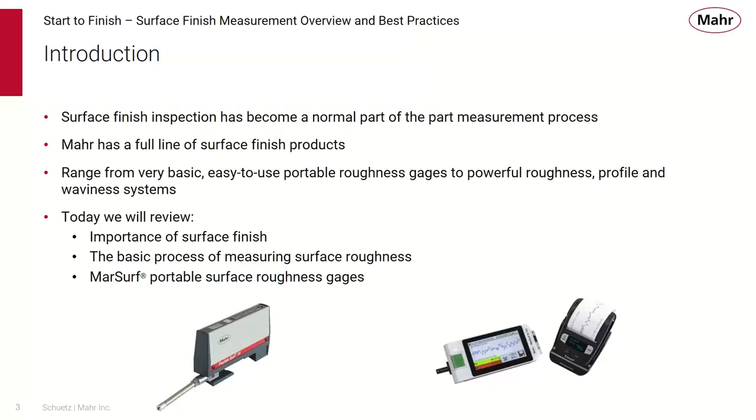Surface finish inspection has become a normal part of the part measurement process. Mahr has a full line of surface finish products, ranging from basic, easy to use portable roughness gauges to powerful roughness, profile, and waviness analyzing systems. Today we'll review the importance of surface finish, the basic process of measuring surface roughness, and the MarSurf portable surface roughness gauges we can provide.

It's very important to monitor surface finish. As dimensional tolerances have tightened, form and surface errors become more significant. Tighter tolerances are required for aerospace, electronics, automotive, medical, and precision manufacturing products. Every surface has some function, and unless it's measured, no one will know if the product performs as desired. This chart shows that since the 1940s tolerances have tightened dramatically, and the percentage of form and surface finish within that dimensional tolerance has grown, so it's more important than ever to keep surface finish and form errors under control.

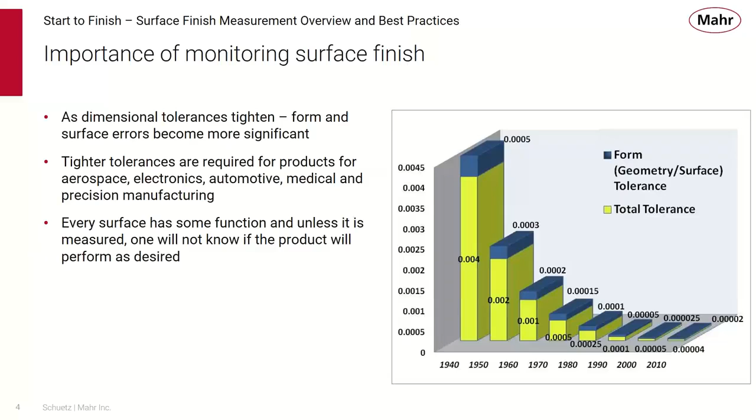Why is surface finish control important? There are many reasons for wanting a controlled surface finish. Appearance is the most obvious - finish affects a part's reflectivity and consistency. Our top photo shows a very reflective part and a matte part, each with a different surface finish characteristic.

There's also surface function, like adherence of coating. If you're trying to paint a surface, too smooth a surface means the paint is not apt to stick. But if the surface is too rough, the paint might not cover it completely.

There's also surface interaction. For a sliding surface you want a smoother, reduced surface finish, but sometimes a surface finish is created with a specific roughness that allows gaps for oil to sit in and help lubricate the surface.

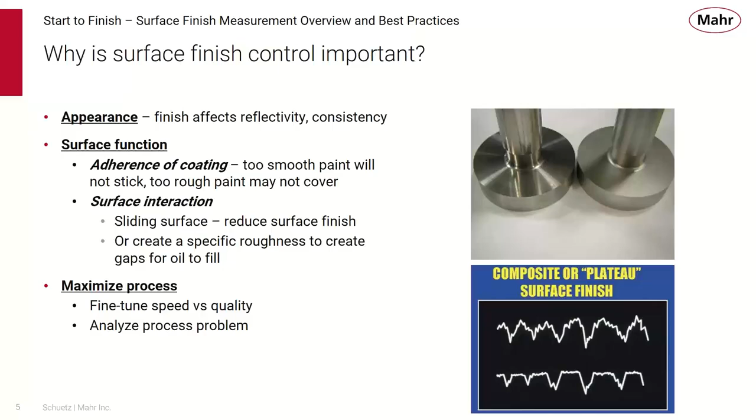We also want to control the surface to maximize the process. We fine-tune the speed and feed quality of the machine tool to produce the best part with the proper surface finish. By looking at surface finish we can also analyze process problems, such as bearing failure becoming part of the surface, causing more roughness conditions.

Where does surface finish come from? Basic components and elements of surface finish come from the machining or manufacturing process. Most machining processes produce three elements of the total profile, with roughness being the most influential.

On the left you see all the components of a typical machining process: motors, pulleys and gears, bearings, a rotating spindle, a tool moving along a carriage, which moves on the bed of the lathe. Each one of those puts a different component of the surface onto the part.

We have roughness from the tool itself, vibration which shows up as waviness, and long range form errors like straightness from the lathe bed. All of those combine to give us a total profile, and by filtering we can select and look at each component individually.

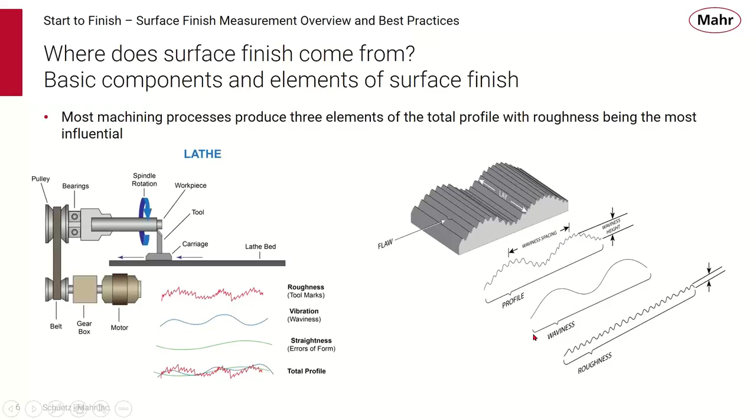Surface finish measurement started a long time ago with a scratch pad standard. This was the old thumbnail test, where operators would scratch their thumbnail over a patch to get an idea of how rough that surface felt, then compare their workpiece to that standard. As you can imagine, that's a very human-influenced measurement.

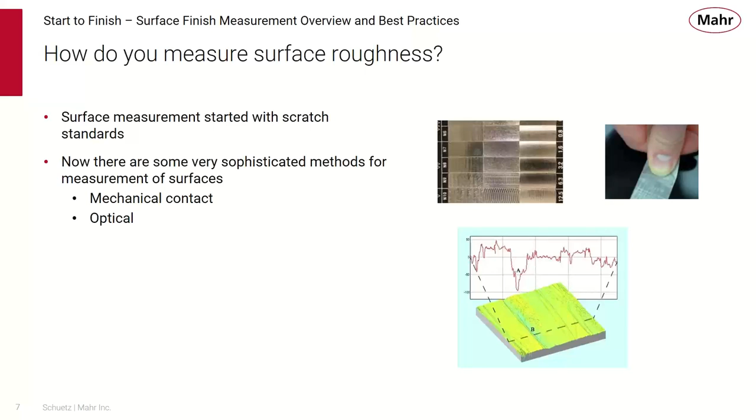Now there are some very sophisticated methods for measuring surface finish. These are mostly mechanical contact measuring systems, but rapidly over the past five years or so, optical surface finish measurement has become very popular and very high performance. But we'll concentrate mostly on contact surface finish.

Basically there are two contact methods for surface roughness evaluation, and Mahr provides both types of surface evaluation measuring instruments - portable roughness instruments using skidded measurement, and also skidless portable measuring instruments.

With a skidded measurement, we have a drive that moves a probe along the part, and within that probe is a skid which follows the surface with the probe contact going through it. So skidded instruments measure only roughness - waviness is filtered out by the skid following the surface, and most portable instruments use this skidded method.

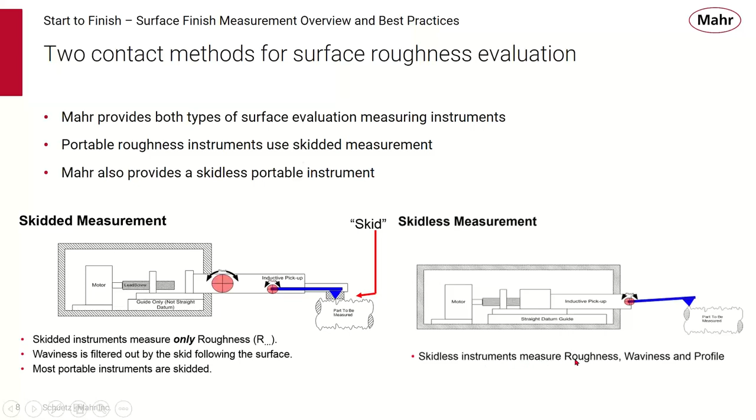Mahr also makes skidless measuring systems. These types of probes and drives have a precision, straight reference datum as a guide, which the probe follows, and just the contact itself monitors the complete profile of the part. So skidless instruments can measure roughness, waviness, and profile.

Now, once we measure the profile, we want to be able to analyze the results, and those involve using different parameters. These are standard measuring processes for determining what that roughness represents. There are nearly 100 parameters for surface finish evaluation, used for things like the stability of the manufacturing process, finding the functional characteristics of surfaces, or determining the analytical capabilities of the instruments themselves. We want some standards to tell us how good our systems are.

Now, the most common parameter is R sub A, or RA, or roughness average. Since the roughness profile contains peaks and valleys of different heights, an averaging method is used to quantify the surface. There are very similar methods. Some other common ones are R sub Z and R max.

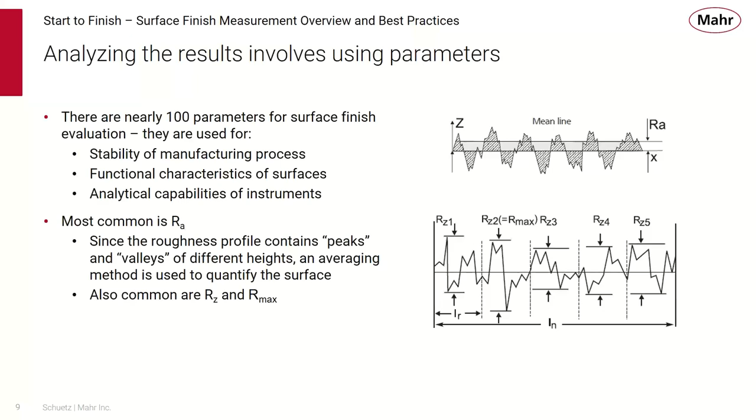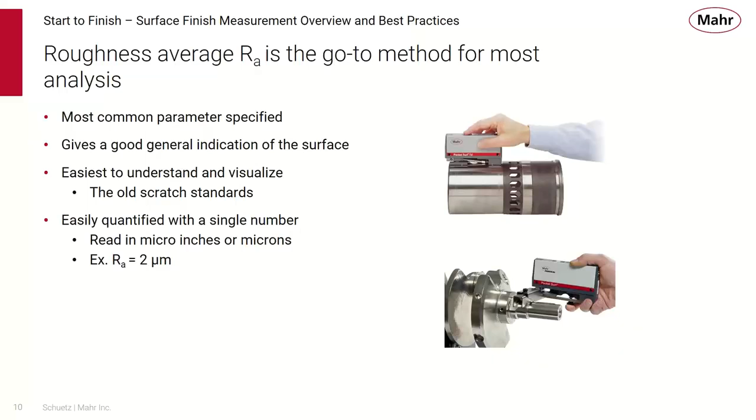But roughness average, RA, is the go-to method for most analysis. It's the most common parameter specified. It gives us a good general indication of the surface. It's easiest to understand and visualize, a lot better than the old scratch standards, and it's easily quantified with a single number. You read micro inches or microns generally as the dimensional measurement, so it's very easy to understand that R sub A equals 2 microns. RA is the most commonly specified parameter, particularly in the US.

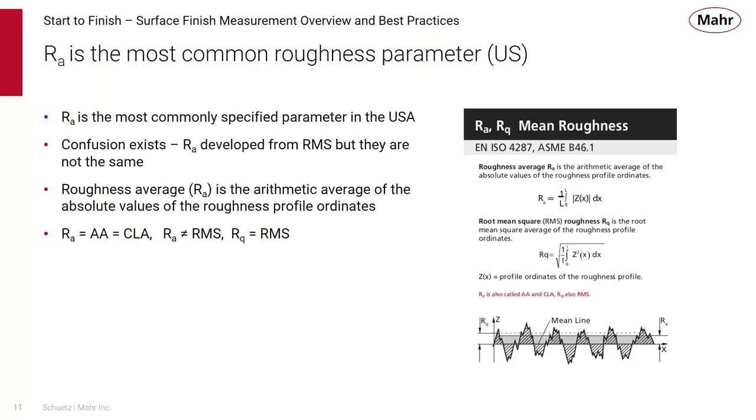Now, confusion still exists from many years that RA was developed from RMS, but they really are not the same. Roughness average is the arithmetic average of the absolute values of the roughness profile ordinates. So RA equals arithmetic average or centerline average. RA does not equal RMS. There is another parameter called RQ, which equals RMS. Within all the ISO or ANSI standards, there are formulas that describe how to calculate the various parameters.

Now you can have very different surfaces and get the same R sub A. Surface performance is different due to bearing contact, for example. RA is often specified and is valuable for monitoring process stability, but other parameters may be needed to monitor for surface function.

So looking at these two drawings, you can see that they have very different characteristics, but because the peaks and the valleys are the same, you're going to get the same roughness average, but they're going to act very differently. If this is a shaft rotating on a bearing-like surface, this is probably going to cause a lot of scratching or lots of forces on those peaks. Where with this type of surface, that contact area or bearing surface is really spread out over the part, and this one is apt to perform better. There are ways to identify which one of these surface characteristics we have.

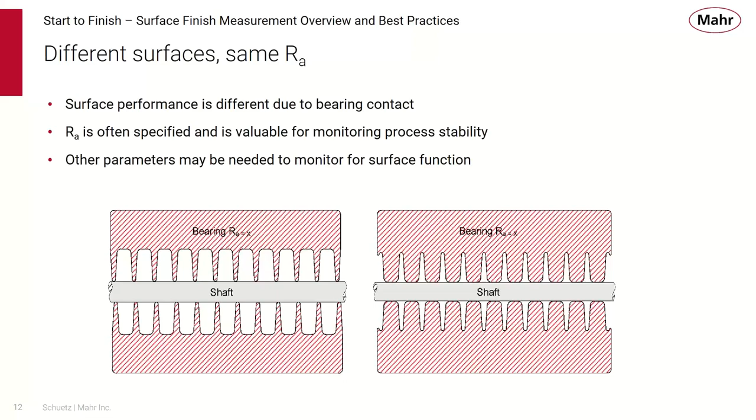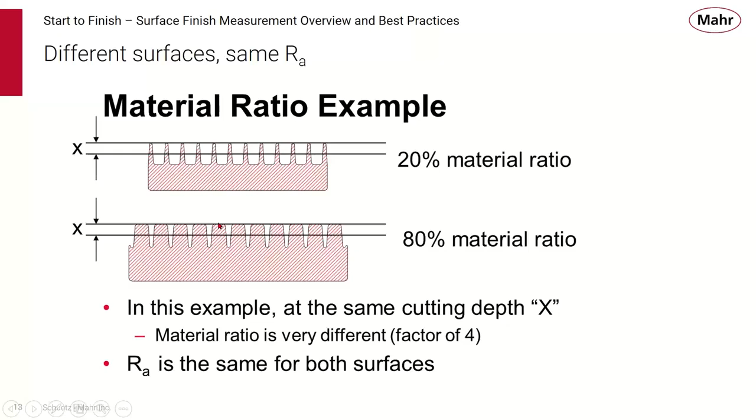One of the ways of doing that is using something called material ratio. You can see that as we take a depth from the peak of the surface, we can calculate how much of the surface is really going to be contacting the part. In this example, at the same cutting depth, the material ratio is very different, in fact, by a factor of 4. But in both cases, RA is the same for both surfaces. So what I'm showing here is that there are different parameters that can give us different information, and material ratio is a way of expressing that contact ratio at different cutting depths.

So you can see this is a system profile done by one of Mahr's machines, where a sine wave was used with an example of 5 micron, and we can plot out, for every depth, what that material ratio is. These are just common parameters that are available in many machines.

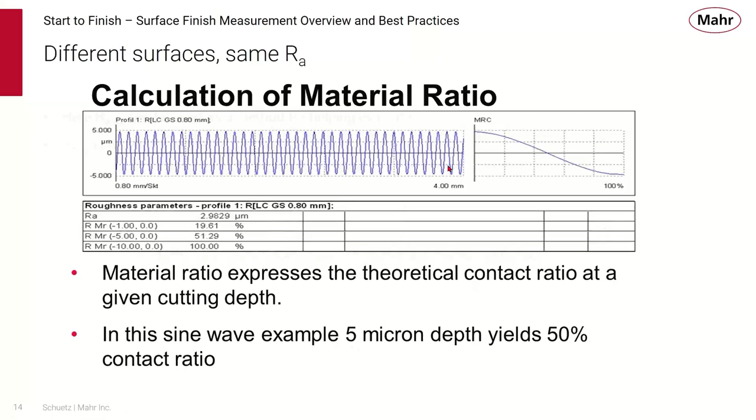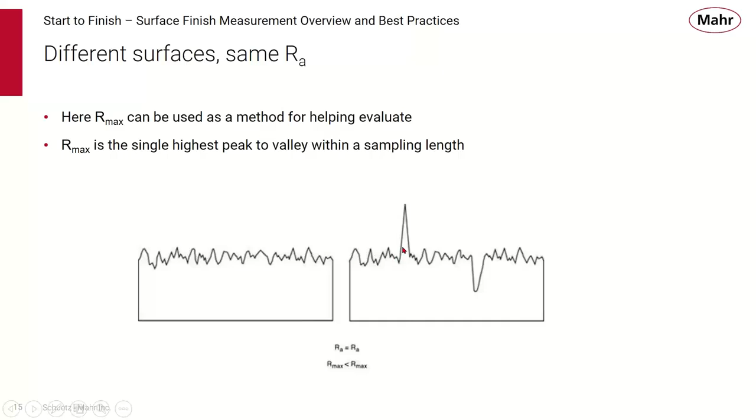Now, there are other different surfaces, but again, they can give us the same RA. But again, using different parameters, we can help evaluate what that surface is really doing. In this case, R sub max can be used as a method to help evaluate some peaks that might be within the surface that can cause problems in function. R max is the single highest peak to valley within the sampling length. So in these cases, the RA might be the same, but the R max is going to be dramatically different.

In the rest of the world, R sub Z is a more common way of analyzing the surface, measuring roughness depth. R sub Z is the most commonly specified parameter throughout the industry outside the US. RZ is the average vertical distance between the highest peak and the lowest valley in 5 sampling lengths. RZ is more sensitive than RA to changes in surface finish because heights are examined, not averages. There is no formal conversion between RA and RZ. The best estimates are where RZ is 4 to 7 times the RA value. So this is basically a very useless comparison. You should either measure RA or RZ.

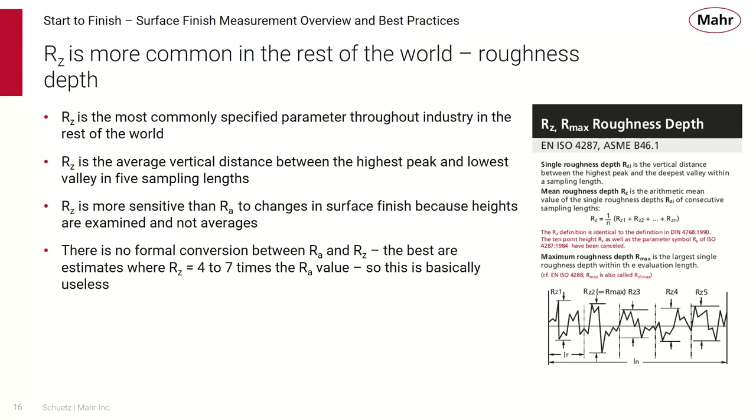Now, where can you go wrong in surface finish gauging? Well, there are a number of different points that we must consider when making a surface finish measurement.

The first one is not understanding the different parameters. There are ISO standards, DIN standards, Japan standards, and you should understand which one you're measuring to, so that if you're in a world organization, you're measuring all parts the same way.

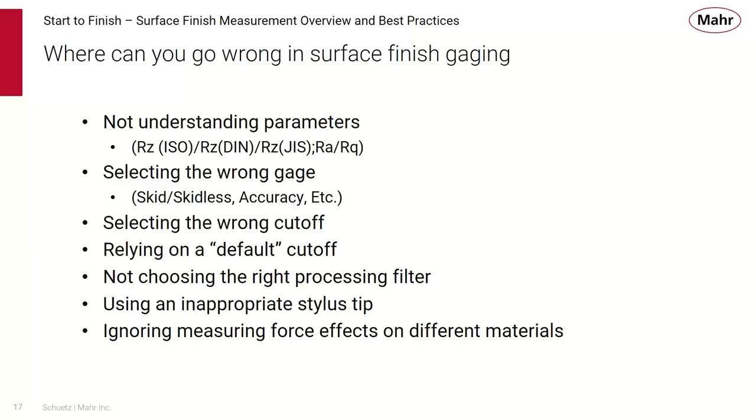Sometimes you can select the wrong gauge, whether a skidless gauge or a skidded system, and the accuracy can affect readings. Selecting the wrong cutoff or sampling length, relying on a default cutoff and letting the machine do all the work, not choosing the right processing filter, using an inappropriate stylus tip since tips come in different radii, and ignoring measuring force, which can affect different materials.

So there's non-adherence to the measurement conditions. Whenever we're setting up a measurement with a surface finish machine, we should understand the cutoff length, the total measuring length, and the type of tracing system.

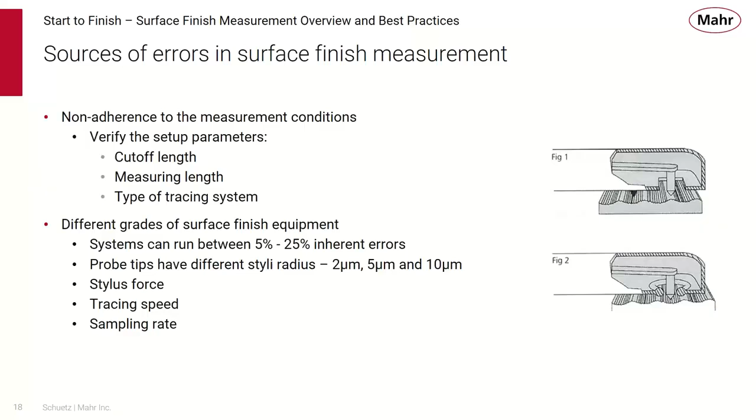There are different grades of surface finish equipment out there, and they can cause differences in readings. Systems can run an average of 5 to 25% inherent errors. Probe tips have different styli radii of 2, 5, or 10 microns, and the stylus forces differ between them. Tracing speeds and sampling rates can also differ, and all of these can affect the result provided by the systems.

Another source of errors is the environment and the setup of the measurement process. There could be vibrations in the environment which translate as noise on the profile. Part movement while being measured is a problem, as are driving and guiding difficulties in the drive unit. If there are problems in the drive, you can get misread readings.

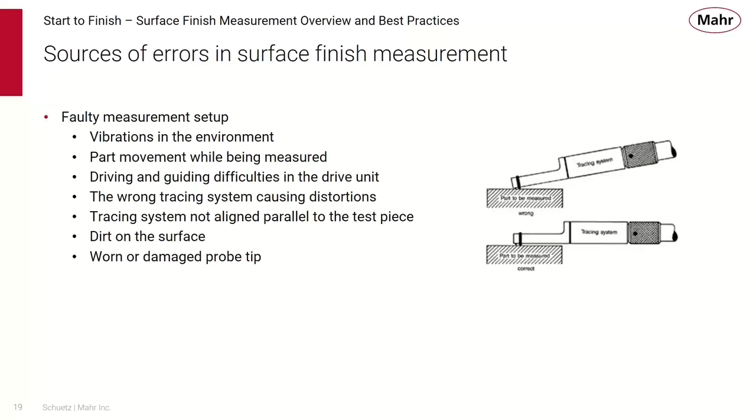The wrong tracing system can cause distortions, or the wrong contact for that particular part. Tracing systems may not be aligned parallel to the test piece. There might be dirt on the surface, or you might have a worn or damaged probe tip. All of those are sources of error within surface finish measurement.

Now, how do you check the performance of a surface finish gauge? Well, standards have been developed to help define the specifications, use, results, and testing of surface finish gauges. Since surface finish consists of peaks and valleys, reference specimens contain peaks and valleys in various shapes and amplitudes that are known, measured, and certified.

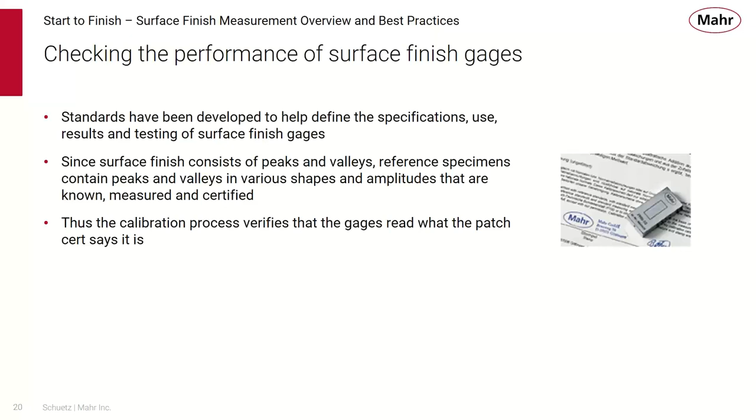Thus, the calibration process verifies that the gauge reads what the patch certificate says it is. It's important to verify that your surface gauge is using the same probe tip radius that the test patch was certified with. Otherwise, you may be adjusting error into the system, which you should not be doing.

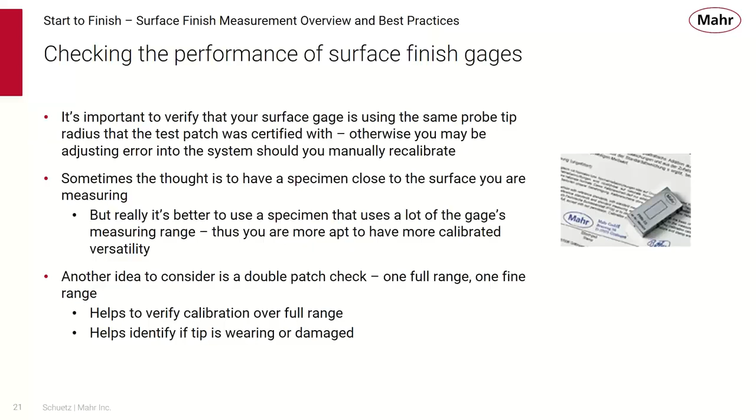Sometimes the thought is to have a specimen close to the surface you are measuring, but in reality, it's better to use a specimen that uses a lot of the gauge's measuring range. This makes you more apt to have a calibrated system over its whole range, offering greater versatility. Another idea is to consider a double patch check, one full range and one fine range, as this helps verify calibration over the full range and helps identify if a tip is wearing or damaged.

Now, traditionally, surface finish was done in a quality lab in the back of the manufacturing hall, for example. And there were shortcomings to this traditional method. It was reactive by nature - something where once the part was manufactured, you're reacting to whether it was good or bad.

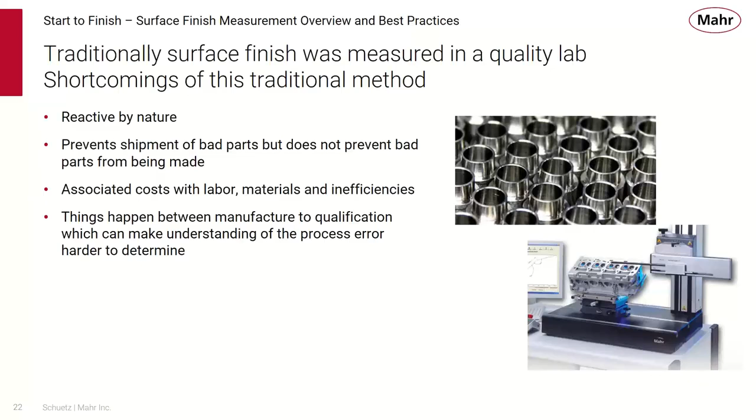It helps prevent shipment of bad parts, but it does not prevent bad parts from being made, which is very expensive. There are associated costs with labor, material handling, and inefficiencies when a part is manufactured then brought to a surface finish gauge, because things can change with the manufacturing process between qualification and further production.

And basically, it became a go, no-go method of inspection. Parts are qualified as either go or no-go. It's good for sorting parts and preventing bad parts from being shipped, but there's added cost in materials, labor, and rework to do that, and it only recognizes deviations so severe that they make the part good or bad.

There's no process control with this. And the greater the time between manufacture and inspection qualification, the greater the difficulty in finding the flaw in the manufacturing process that caused the bad part.

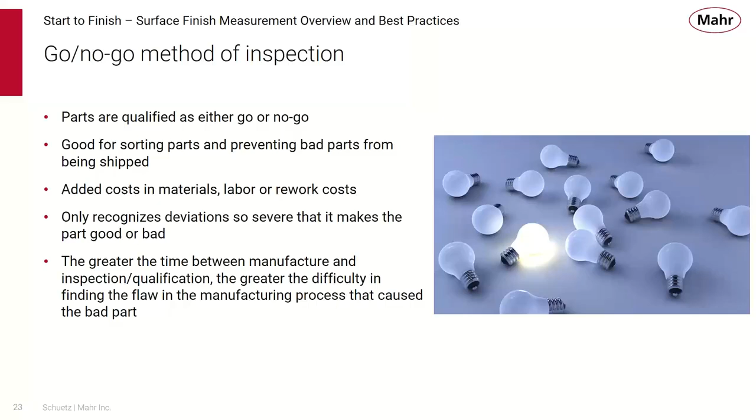So there's a productivity change going on with surface finish. Now we're giving measuring tools to the machine operator, which provide information for decision making right at the point of manufacture. We're bringing portable surface finish testing equipment to the point of manufacture, which helps us find bad parts immediately, with no lag time between manufacture and inspection.

It prevents bad parts from being manufactured because we can make changes as we approach the tolerance conditions. And most of the products today are digital, providing output which allows data to be collected to help with that process control.

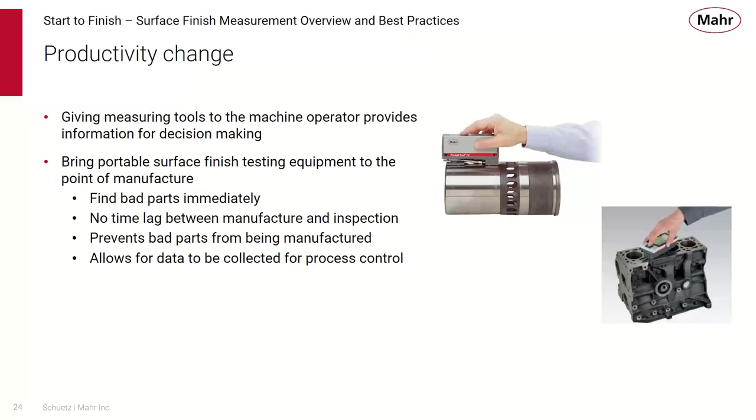Now, operators need tools that are simple to use. Operators may be experts at running their machine, but they are most likely not experts on surface finish measurement. Many surface texture standards are often outdated and hard to stay up to date, and even seasoned employees can have a tough time grasping the intricacies of surface metrology. So there's a lot involved with surface metrology, but the idea is to make it simple to put into the hands of the machinist.

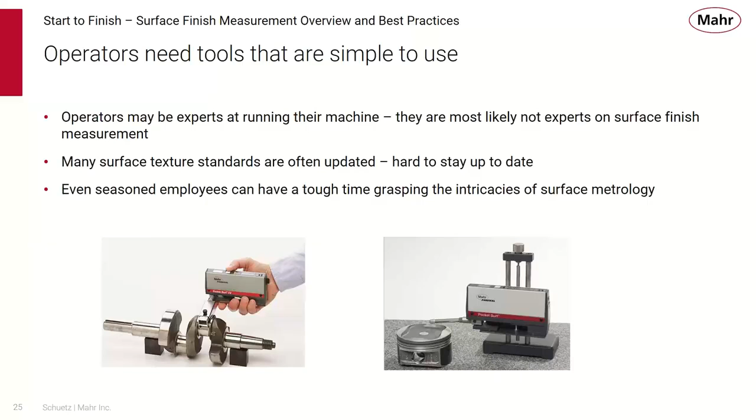Mahr offers a complete line of portable surface shop floor gauges and measuring tools. Here you can see our complete line, the Pocket Surf, our PS10, the new M310, and the M400. All of these are portable surface finish measuring tools, each with their own specific characteristics that provide surface finish measurement at the point of manufacture.

So let's take a look at the Pocket Surf 4 for skidded roughness. The Pocket Surf 4 is ideal for an entry-level application of surface measurement. It's been around for nearly 35 years. It's probably the easiest to use portable surface gauge out there with its single one-button operation. It's simplistic in that it limits selection, via a switch of doing R sub A, RZ, or R max. It has 3 cutoff length selections, and it can be in metric.

So it's simple to understand. It has a single display unit, which gives us the result. It has output capability for data collection, and it's extra versatile with its 4-position probe, pointed out here in the picture, and it has a wide range of accessories with its probes and different stands.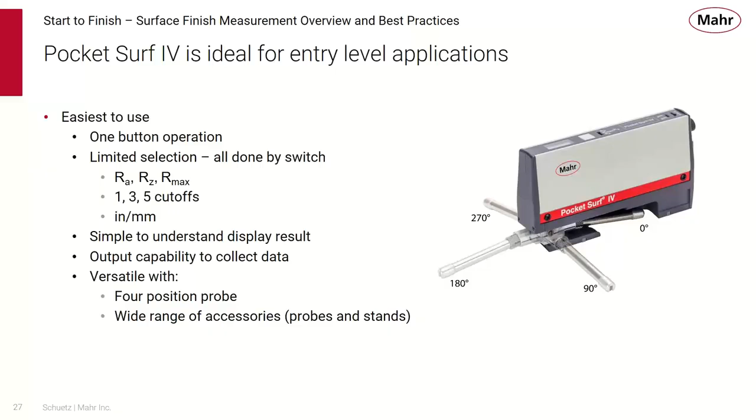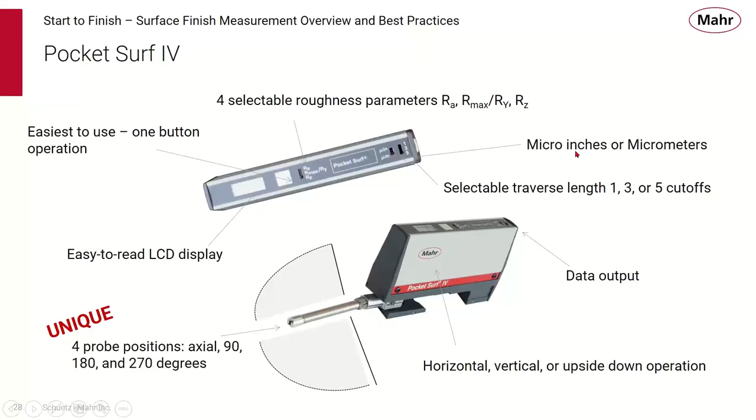Now here's a little view of some of the features of the Pocket Surf 4. It's probably, like I said, the easiest to use. One button operation starts the measurement process. It has a simple, easy to read LCD display. It's unique in its 4-position probe positions, which gives it greater versatility. It can be used in any orientation, has data output, selectable traverse lengths and cutoffs. It has micro inches or micrometers for resolution, and it has 4 selectable roughness parameters.

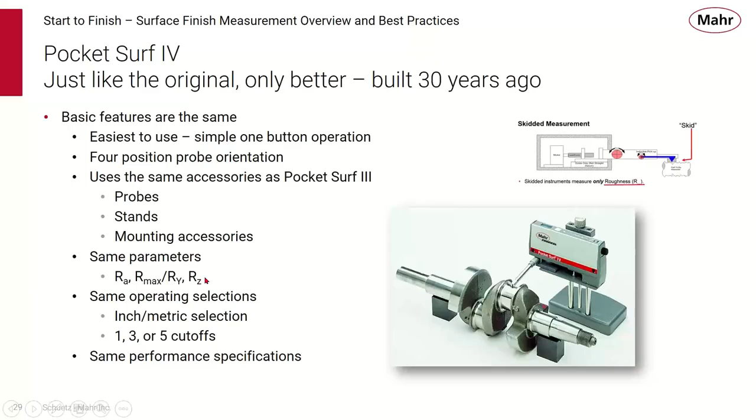Now, recently we've updated the Pocket Surf 4. It's just like the original, maybe only better, the one that was built 30 years ago. It has all the same features. People know this as a standard for measuring surface roughness at the point of manufacture. Easiest to use, lots of probes and stands, basic parameters and setup. That's the standard for many of the surface finish measurement at the point of manufacture.

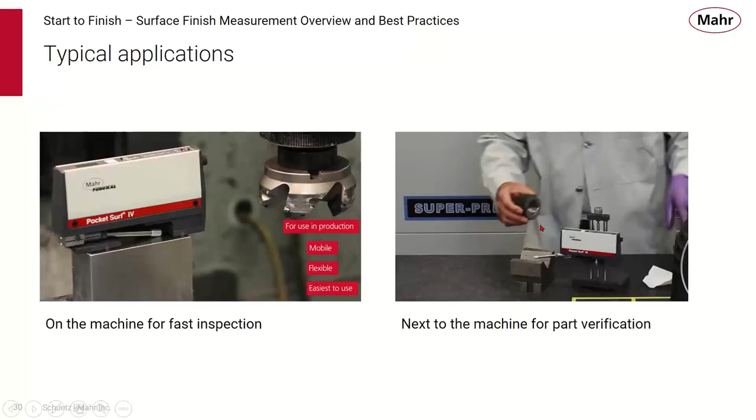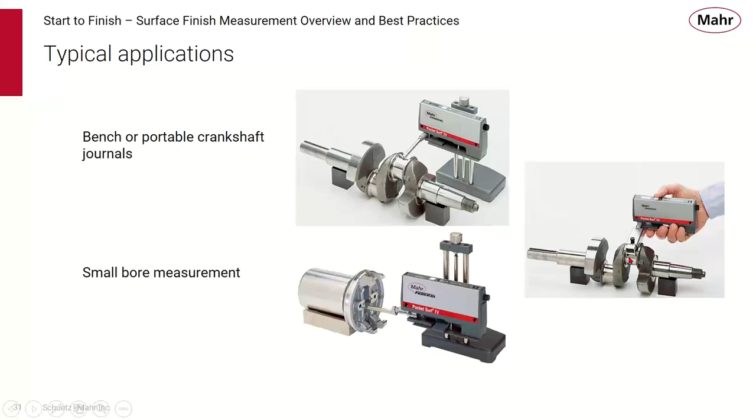And it can be used in the machine, or the part can be brought to the bench, and with its fixtures, it's very simple to get the part aligned to the Pocket Surf 4. Typical applications for measuring crankshaft journals. You can see the right angle probe here. Small probes are available, and we even have a handheld for measuring on small diameters, maybe in the machine.

The next step up for our skidded product is the PS10. The PS10 is a recent entry into the market, and what's really unique about it is its large LCD display that acts very similar to a mobile phone. So everybody's familiar with the way phones work nowadays with its swiping and selection and touch screen. The PS10 tries to bring this operation to the machinist.

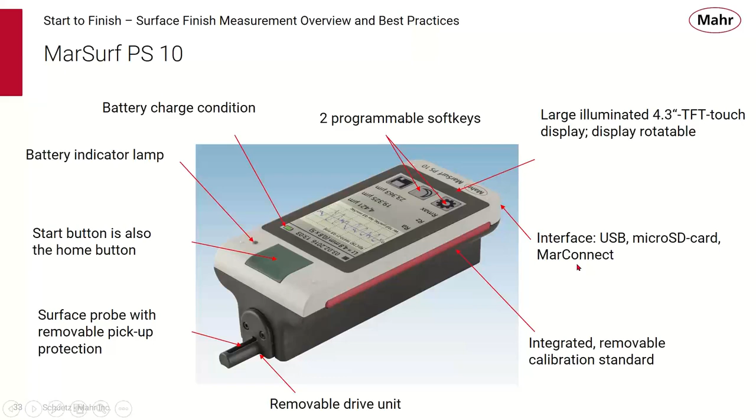So we have a touchscreen display. It's battery rechargeable with indications of when the battery is fully charged or not. It has a single button to start and stop the measurement. A surface probe, which allows for removal, but it also has a pickup protection device. The whole drive system is removable to put into separate fixtures. It has an integrated removable calibration standard, and it has interfaces for USB. You can store the measurements on a micro SD card, and it can use MarConnect for our Marcom software.

So the PS10 has 31 parameter capabilities. You can see we can drag the screen down with the touchscreen to select by touching the parameters that we want. It has a removable drive unit. Normally the drive is held within the system, but you can take it out with its built-in probe protection and then mount the drive in a stand, or use the drive independently in a small bore on the machine.

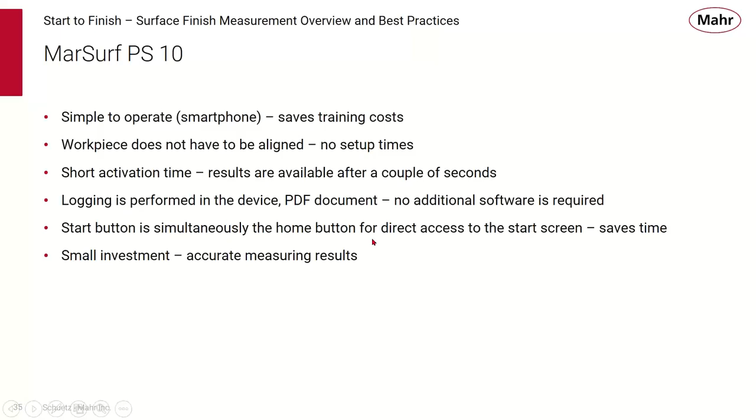So the whole concept with the PS10 is a simple to operate system like a smartphone. It saves in training costs. It helps because the workpiece does not have to be aligned so critically, so there's no complex setup times. It has a very fast response. You're able to get results in seconds. Logging is performed on the device in a form of a PDF document, so there's no additional software required. You can make the PS10 act like a memory stick, plug it into your PC, and you'll see PDF forms for each of the measurements that you've made. It's really a small investment for some very accurate measuring results.

All the measurements that you made are put onto a memory stick, the micro SD card, and you can plug that into your PC and view those results.

We have this integrated calibration standard, which is unique. You can pull it out and make a quick test to get guaranteed results anywhere.

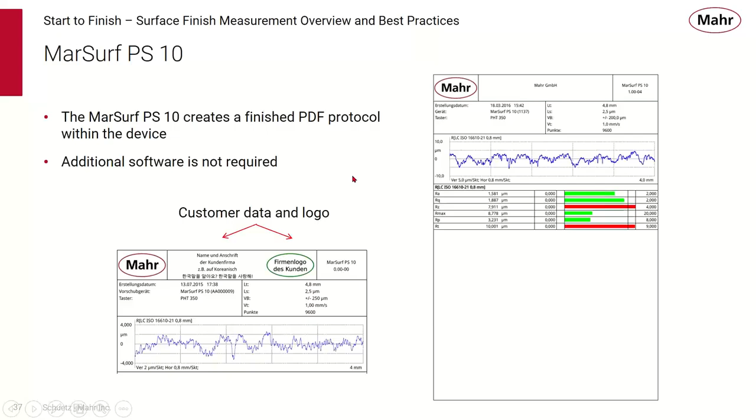The results can be sent directly to MarCom software. This is Mahr's free way of collecting data and storing it to a PC. The results can be transferred into Microsoft Excel, a text file, or into a key code location.

We can choose alternative methods for transmitting data, whether it be the function on the PS10, or we can remotely control the device to start and collect the data.

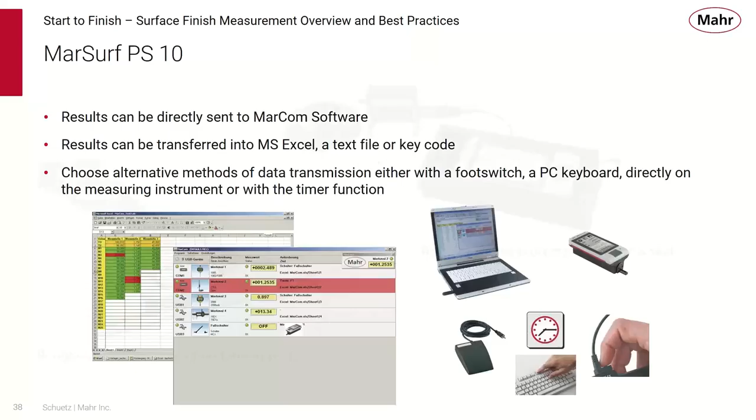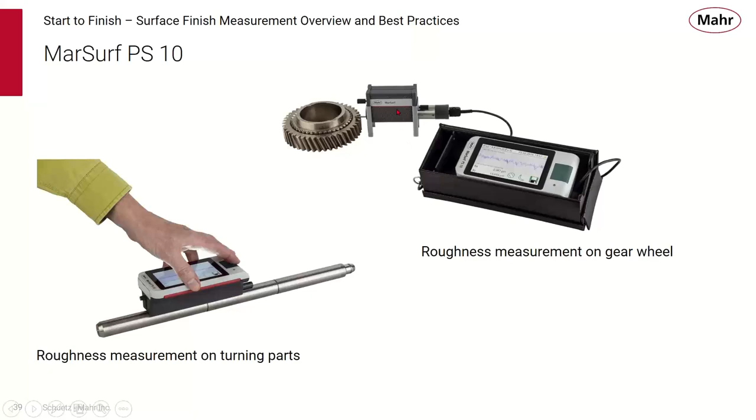So there's lots of different applications. You can use the PS10 right on the part. It has built-in V's to help align the PS10 to the part. Or you can take the drive out, mount it into this little holder here, and make this a very portable roughness measurement, for example, on this gear. There are different stands available for holding the whole drive and PS10 together, or you can mount the drive independently.

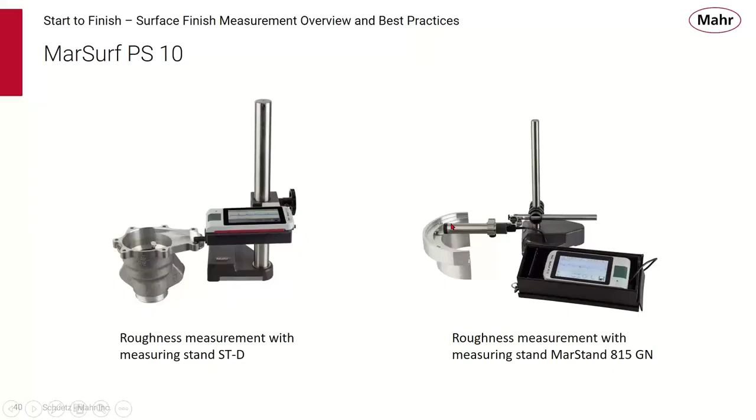Now let's talk about the latest addition, the M310 skidded roughness measuring system. The M310 is a measuring system very similar to the PS10, but with a lot more versatility.

It has the same large illuminated touchscreen display. It's rotatable, scratch resistant, more indicators for status, the simple start button, removable probe, has some freely programmable function keys.

What's really important is on the back here, because it has the capability of connecting wirelessly to a Bluetooth printer, so that when you're doing the material ratio curves, you can plot those out.

Sometimes people think, why do I need a piece of paper? Well, there's nothing better to talk about than a piece of paper which you can look at with your colleagues, talk about the process, and maybe even staple it to the work orders that are traveling with that part. So they can be a very valuable tool out on the shop floor.

There's also capabilities on the back to use a USB type interface for connecting keyboards or scanners. We still have the micro SD card for saving the results. And this has a duplex capability with MarConnect to have external programming and setup of the device if you want to do that.

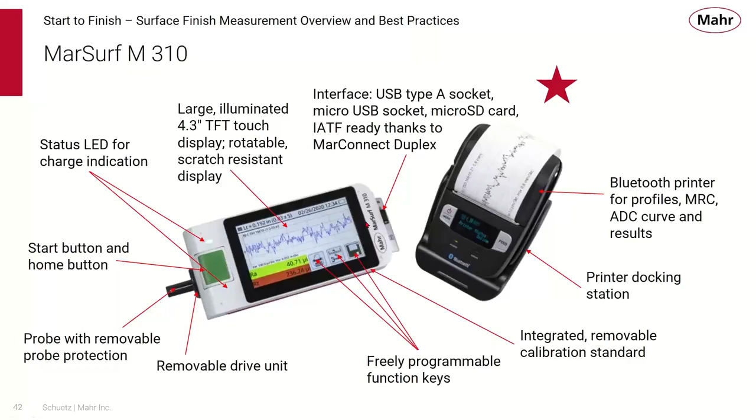So here's some of the important software features for the M310. Again, 31 parameters, very similar performance to most laboratory surface finish measuring systems. We have display and printing of the MRC and ADC curves.

For tolerance monitoring, tolerance limits can be set for all selected parameters, and out of tolerance conditions are signaled on the display and on the report. So you can see color coding for things that are in or out of tolerances. And you can have specification of the cutting line C in micrometers or percentage, which makes it easier to understand your MRC curves.

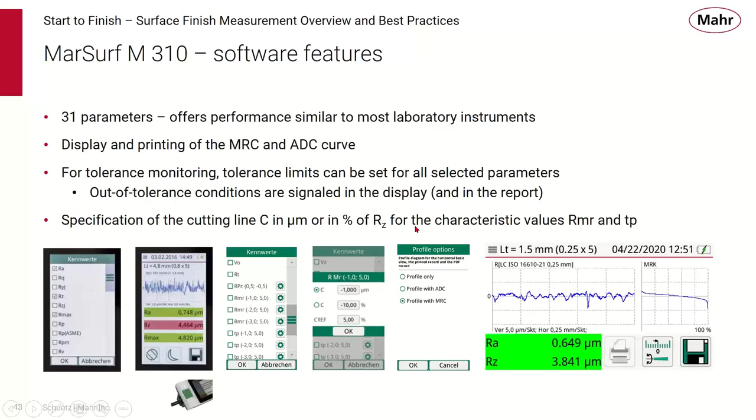The USB Bluetooth printer with docking station gives you direct printout results. You can detect the device status at a glance. These are all marked on the M310 here to know when the system is running.

It uses a rechargeable battery. You can get over 1,200 measurements without having to recharge the system. And it uses a button which is made out of an oil-resistant plastic that's really meant for the shop floor and can take thousands and thousands of cycles without showing any wear.

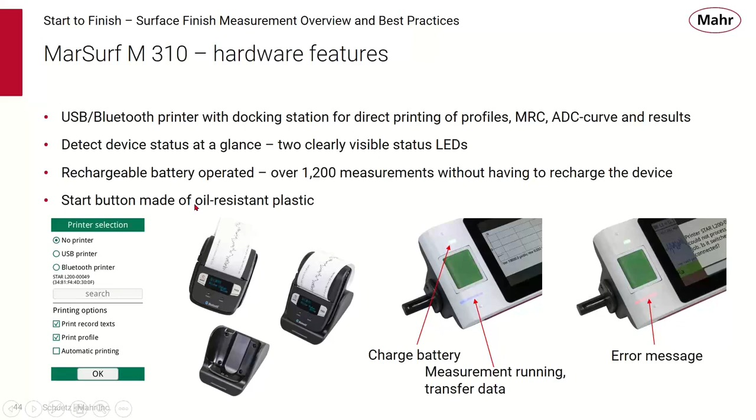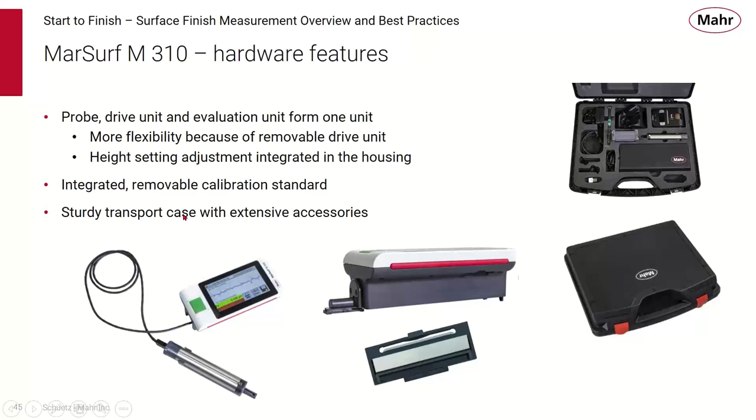Similar hardware features to the PS10, with the probe and drive being a removable system, so it offers more flexibility. Different height adjustments were built into the device to make it easier to apply to the part. It has the integrated and removable calibration standard, and it comes with a sturdy transport case with extensive accessories.

Now, what's really important with the M310 is its interfaces. It has the USB-A interface for connecting Bluetooth adapters, a Bluetooth printer, barcode scanner, etc.

Rather than set up a system through the keypad, you can use barcode scanning and download all the parameters automatically. It has the micro SD slot, so that you can store all your profiles and so forth on the micro SD card, and then plug the whole system into your PC and look at those results.

The micro USB interface for connection to a PC. This is important for really putting the M310 into the manufacturing process. So now you can build the drive systems into custom gauging, making it that much easier for the user to make measurements at the point of manufacture.

And we have the MarConnect duplex interface, which allows us to take data from the M310 or store the setup parameters on the PC and download them to the M310.

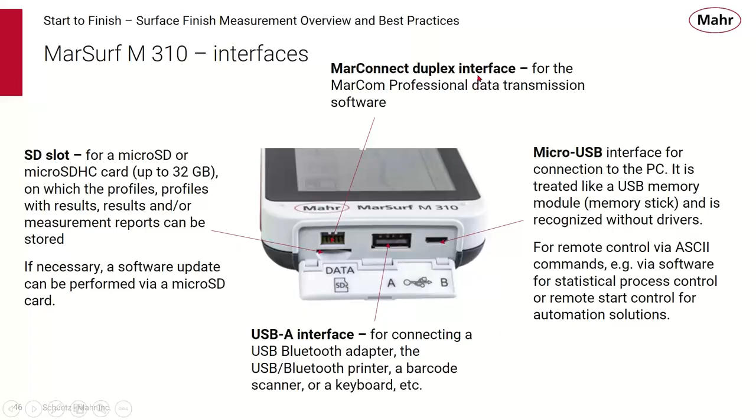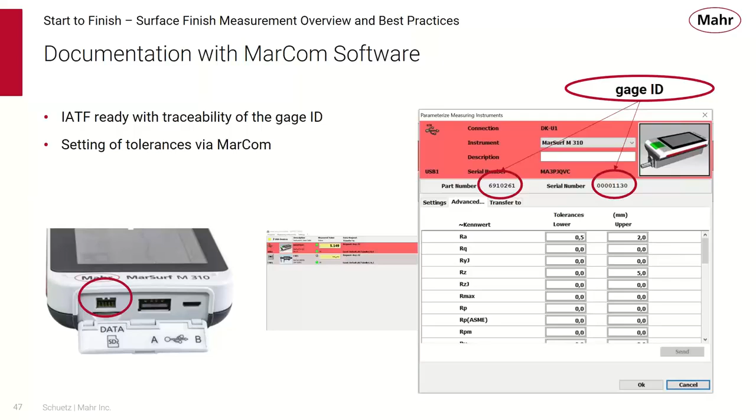Along with the duplex capabilities, we have the ability to store and record the part number and gauge ID number as part of the data collection process. So really now we're tying the whole measuring process together. We know when the part was measured, we know what the results are, and we know what gauge made that measurement—a very key way of tying data together.

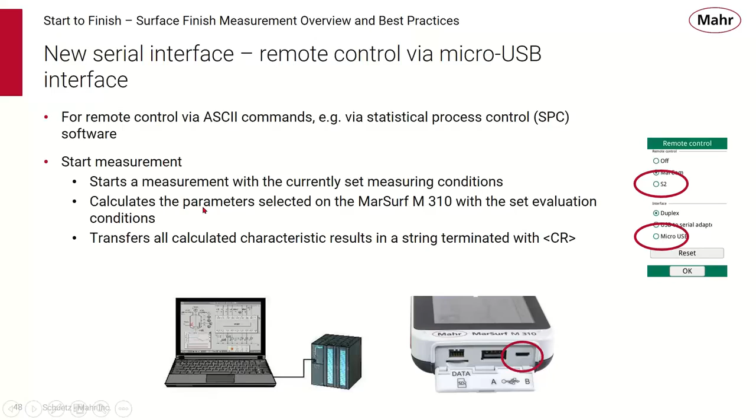The micro USB interface allows for remote control via ASCII commands so that we can control the system with SPC software or with machine control type parameters. So we can say start the measurement from a PC, record those values, calculate the parameters, and all of this comes as part of a standard process.

Here's our typical applications where we can mount the drive into holders, use the drive remotely by itself, or even measure small parts on the holder for the drive.

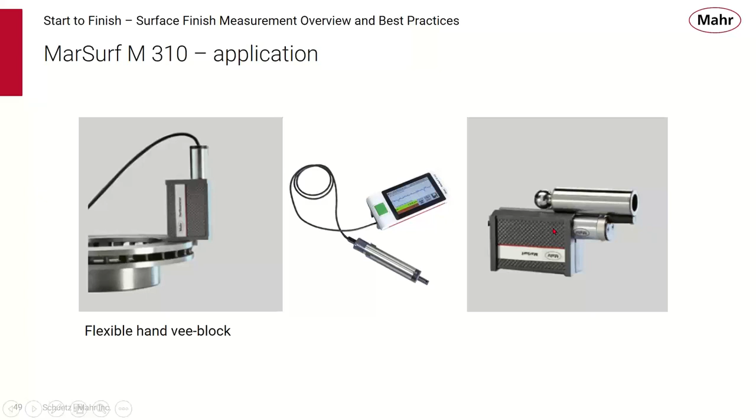Here's an example of a custom engineered solution where we can build the M310 into a fixture gauge, with a tool that holds the part and aligns it properly. It's very simple for the operator just to place the part onto the plug, press the start key, and get the results.

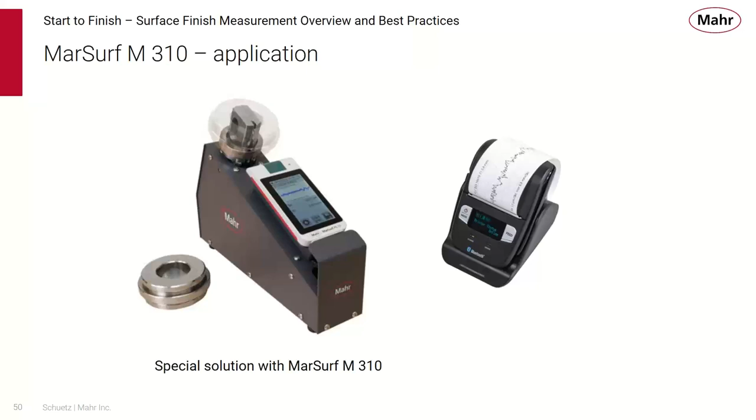This can be taken one step further—an automated system where a robot loads the part onto the plug, and via the duplex control we can control the M310 remotely and do the whole process of measuring surface finish without a person being involved.

Finally, the top end of our portable surface line is the M400, our skidless roughness, waviness, and profiling measuring system.

This is a skidless system. It has motorized positioning, which is unique in the industry. One of the most critical parts of any surface finish gauge is the probe itself.

Mahr incorporates two important features. We have a breakaway probe design—the probe is actually held on with magnets so that if it is accidentally bumped or brought too close to the part, the probe will break off without damaging the system. It can be reapplied and you're ready to go make a measurement again.

With the M400, the motorized positioning allows the user to position the probe above the part, not touching it. When the measurement process starts, the drive will move down, sense that it's touched the part, and then begin driving the probe to make its measurement—less chances of damaging probes. This is one of the most common problems with a lot of the competitive instruments.

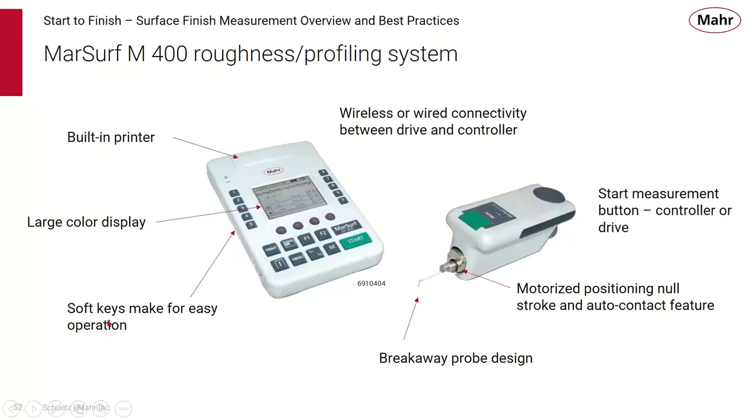We have wireless or wired connection between the drive and the display controller, a built-in printer, large colored display, and all the key functions are soft keys, which makes it easier for the operator to use the system.

So the M400 is a skidless roughness profiling system with a very high precision probe. It provides fast probe arm change due to the magnetic breakaway probe, and takes very fast measurements—only a few seconds of setting time required because of the motorized height adjustment—and uses automatic zeroing, again taking away those critical time functions from the user.

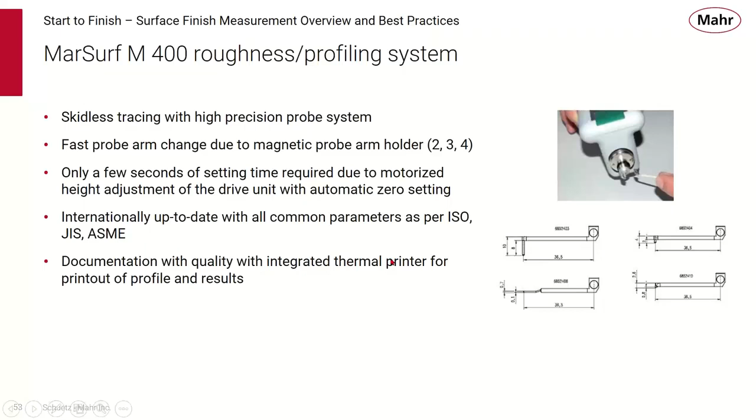It's internationally up to date with all the most common and latest parameters per ISO, JIS, or ASME standards, and you have documentation control with the quality integrated thermal printer, printing out profile and results.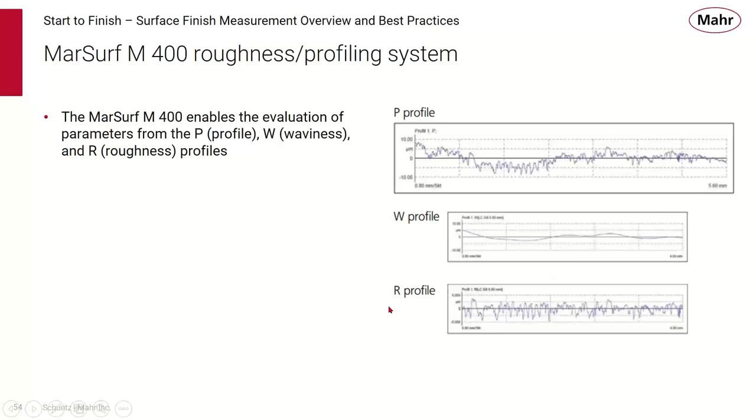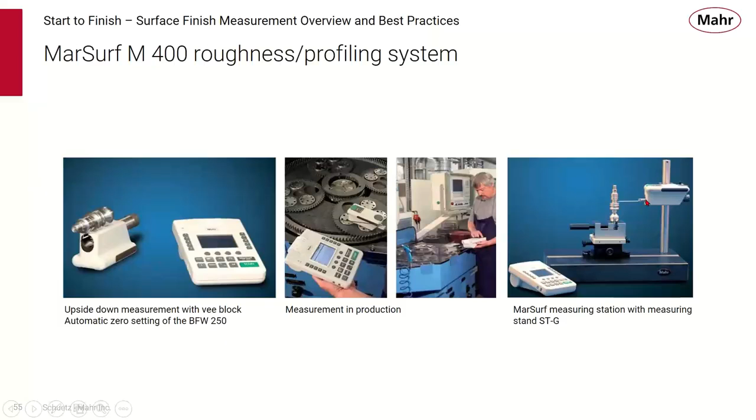Here's our typical applications. The probe can be used upside down, the drive can be brought to the part, and it can be left on the part to make measurements, or we can use the drive in stands or within custom fixturing to make it easier for the operator to use.

Mahr offers a complete portfolio of portable shop floor surface finish measuring tools: the Pocket Surf, the PS10, the M310, and the M400.

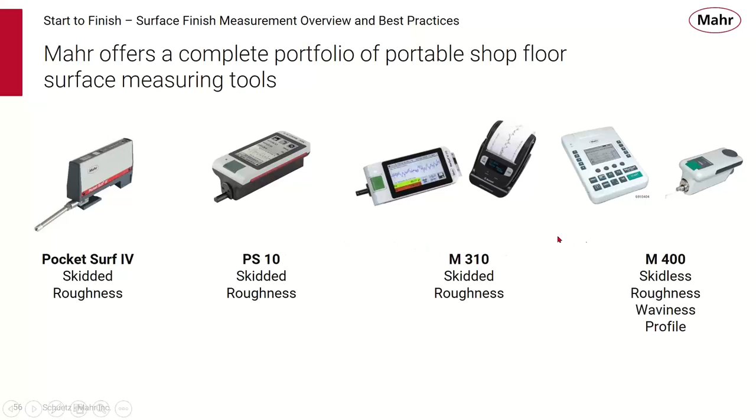To summarize what we talked about today: surface finish is an important parameter to measure. Production automation calls for inspection at the point of manufacture, something that needs to be done by the user, by the operator. The gauge must be powerful but very simple for the operator to use, or else they'll be fearful of it and apt not to use it. Mahr's complete line of MarSurf mobile roughness instruments are a great solution to put portable surface finish measurement into the hands of the machine operator.